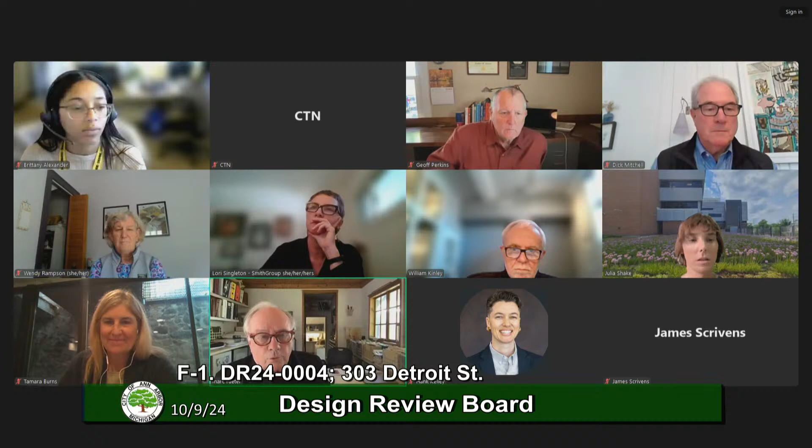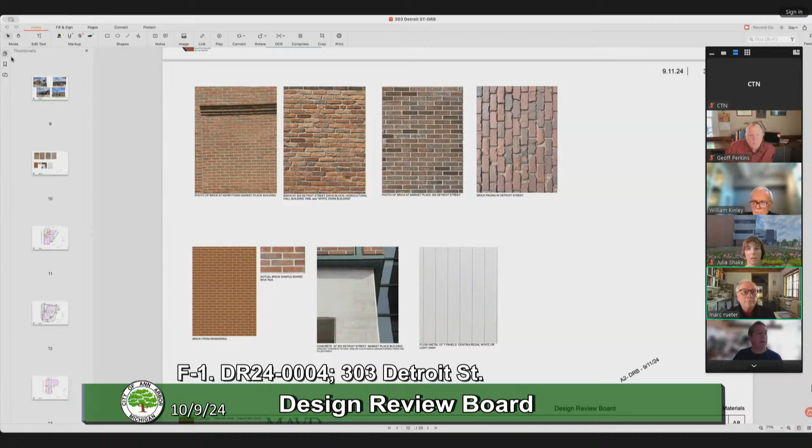So I'm not quite sure how we're going to handle the referencing here. Will you be allowing us to share our screens to show the graphics, or are you going to be doing that, Julia? No, you should be able to. Do you not see the share screen button on the bottom of your screen? Yeah, I'm going to have Jim share that. And is he promoted to speak also? Yeah. Okay, all right, great, okay.

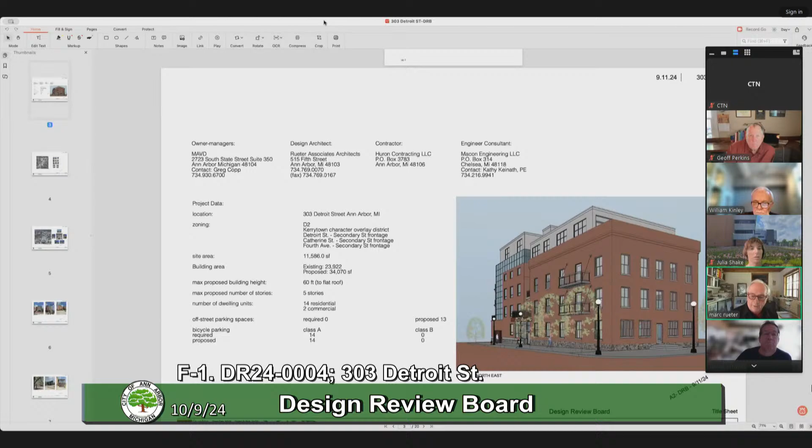So I'm just going to give a little recap here of our design concepts and what our ideas were, and then I'm going to have Jim, as the project architect, discuss some of the other features in more detail. If we go to sheet A4, Jim, which is the exterior views of the old agricultural implement hall and the 1988 addition.

We've looked at this building for a long time, since the building across the street, the Flatiron building directly across the street, took a lot of its design cues from the heavy concrete base that held up the other 4 floors, and some of the other sheet metal elements were incorporated next door.

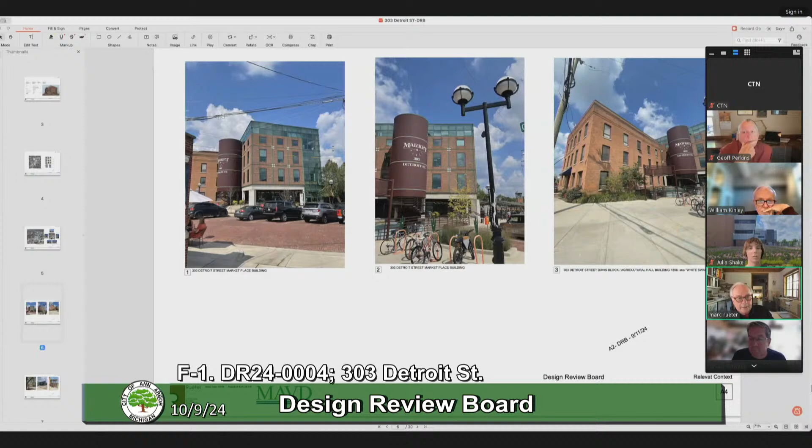Now, the agricultural hall building was built in 1856, and it was substantially renovated over the years with many improvements, including widening the windows to accommodate all aluminum sash.

We think sometime in the mid-50s, something like that. That's why the windows are not quite proportional. The width is not an 1856 kind of demonstration of how you would do a window like that.

Then in 1988, when the new addition was added, designed by Frederick Herman, the existing building was substantially upgraded structurally. The footings were underpinned, more steel was added to reduce the spans on the floors. So right now we have a quite robust 1850s building. The parapet has been rebuilt.

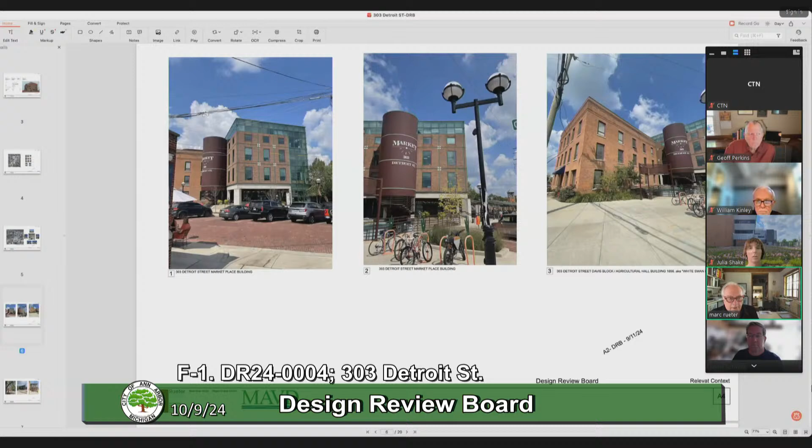Now, let's go to sheet A10. That's the first floor plan. I'm on A10, Mark. Or you're on A10. Oh, okay. Yeah.

One of the early questions was how are we going to handle parking, pedestrian access, elevators, and services. There was a lot of discussion among the design team as to whether we do it off of the Detroit Street side or off the 4th Avenue side. We came to the conclusion that it'd be better to preserve the garden court and the experience on the Detroit Street side and not encumber that with vehicle package drop-offs, pickup and loading, vehicular access.

So this led us to decide to create a new parking entrance with access to a carousel parking system that will accommodate 13 cars, as well as a drop-off and a new elevator located in the slot between the two buildings. And as you can see, the blue common area is a kind of continuation of that existing pass-through.

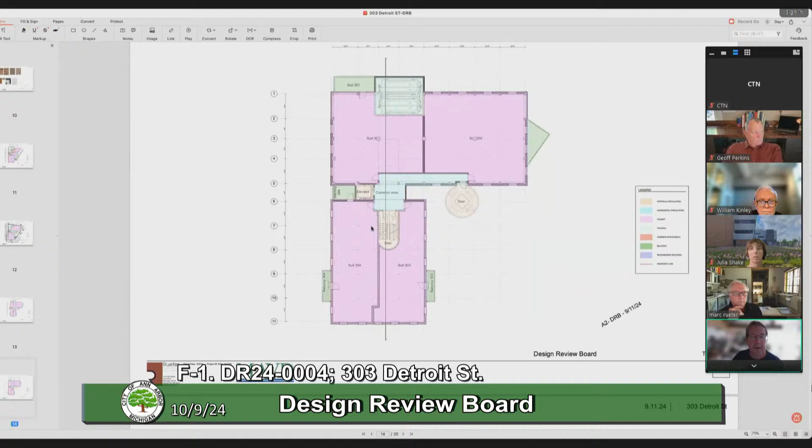Same thing on the 3rd floor, has nothing there. 4th floor, here we're going to add a story on top of the White Swan building. It's going to be accessed from the elevator. We are going to do this

suite. It's going to be a half a flight up from the original 4th floor because the parapet wall is so high on the White Swan building. We're going to have to offset this story. So it's going to have its own entrance from the elevator.

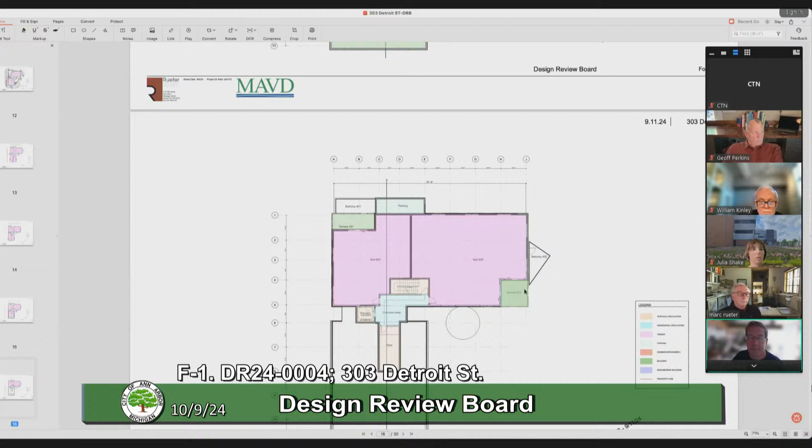On the 5th floor, we're going to add on to the 1988 addition with 2 suites up there, private balconies on opposite corners, and then a common space with the stairs there and the elevator access.

So in the elevation, we're maintaining everything that's original to the building. The only elements that are changing are the upper elements we decided to do with the 4th floor story here, the stair access and the elevator access, and then another 5th story up here on the 1988 addition. This large element here is our car carousel that's facing the farmers market parking lot.

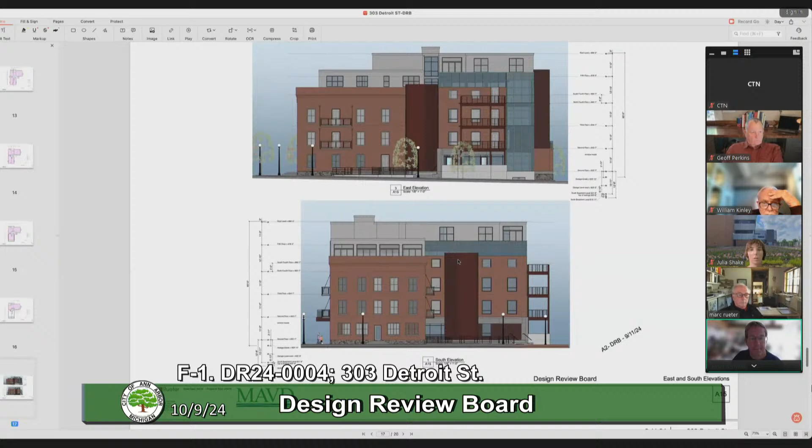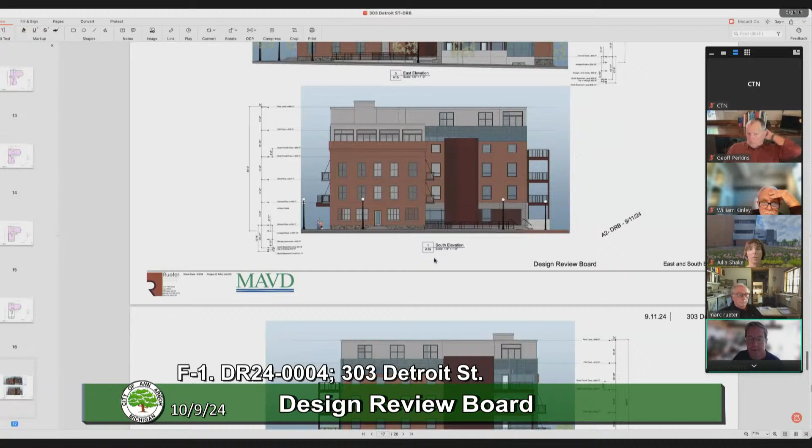Balconies will be added, and they're independent of the building except for the hung balconies that are on the White Swan building. We're going to maintain glazing up there for the upper penthouse suites and do a light metal, either gray or some kind of light metal.

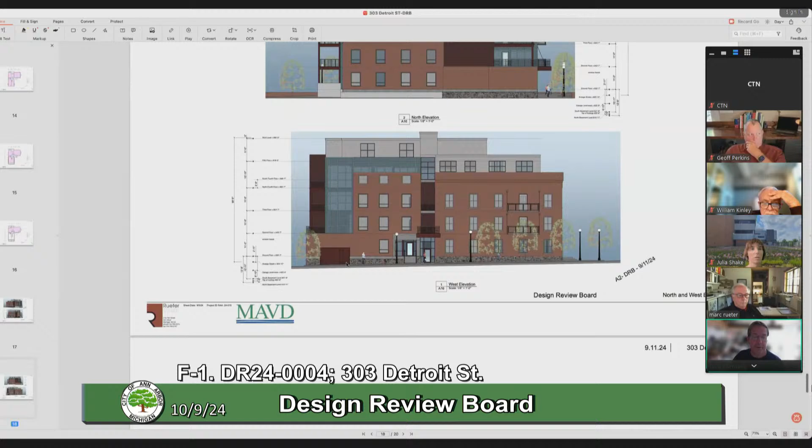This will be the access for the garage on 4th Avenue with a man door there that's accessible. This will be our new canopy here that we're adding as far as an element to our lobby that's at grade on 4th Avenue. And this is the perspective from Detroit Street looking towards that area.

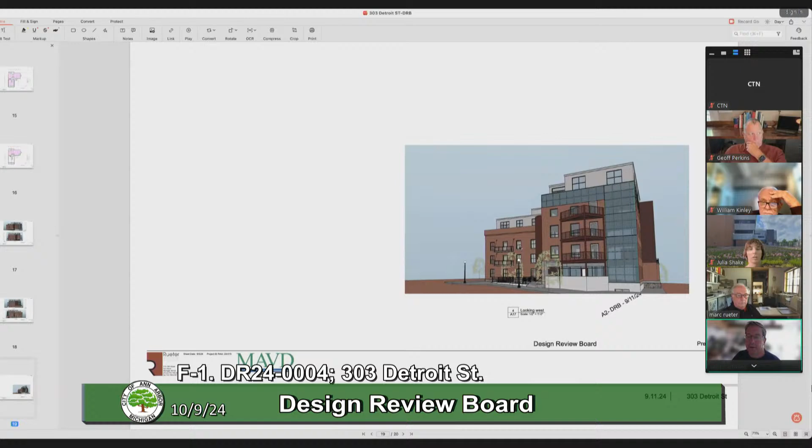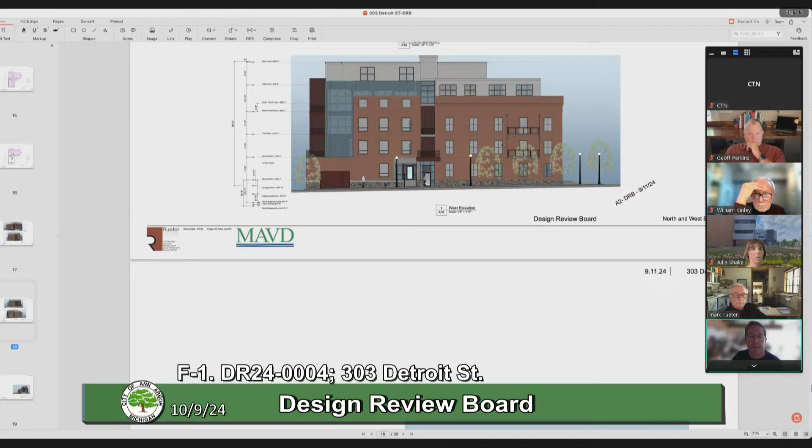The only thing we're going to be doing as far as a change to the building, we have to provide new windows for the facade. We're going to redo the glazing system because it's failing based on its 40-year life. The windows here that were originally in here are an older series awning with the fixed glazing. We're going to go back to more of a traditional window that will be in keeping with the White Swan building. So all these windows will be replaced with new modern window system.

And this is the section. Storage is down here. Car carousel will sit in here. And then the new suites up here on the upper story. Everything else is existing. We'll be just gutting the interiors of the office buildings, removing all the metal stud partitions and providing new spaces there for residents.

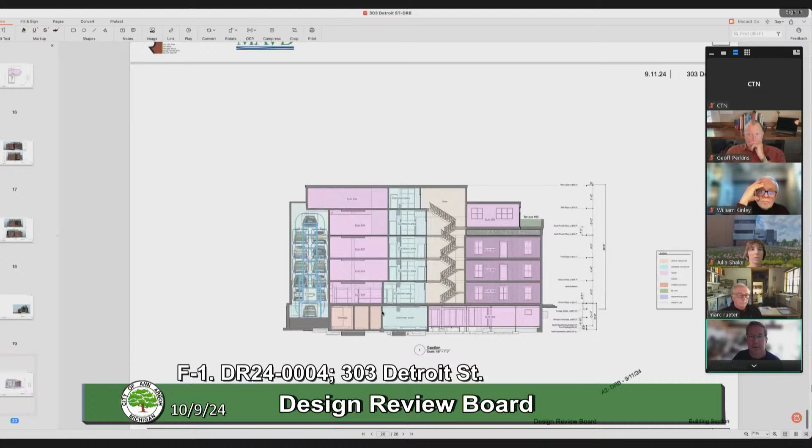That's basically everything that is happening to the building.

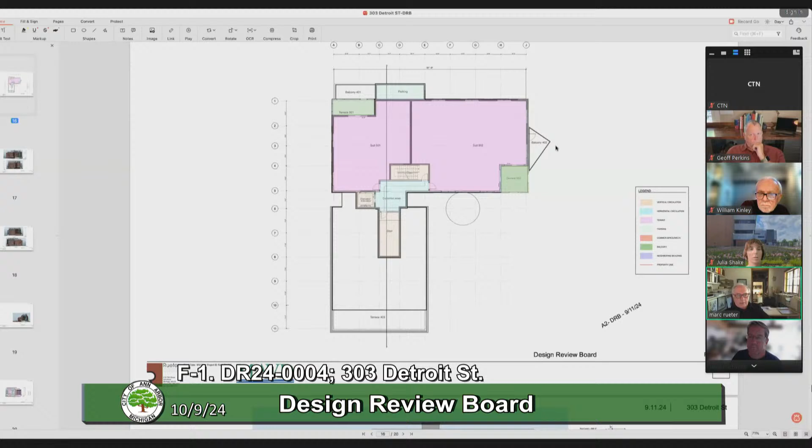Yeah, I might just add that the triangular balcony arrangement on the new addition is a kind of a reflection of the angle of Detroit Street. So whereas the old building assembly did not reflect the diagonals of Detroit Street, this balcony is a small reflection of those directional aspects of Detroit Street.

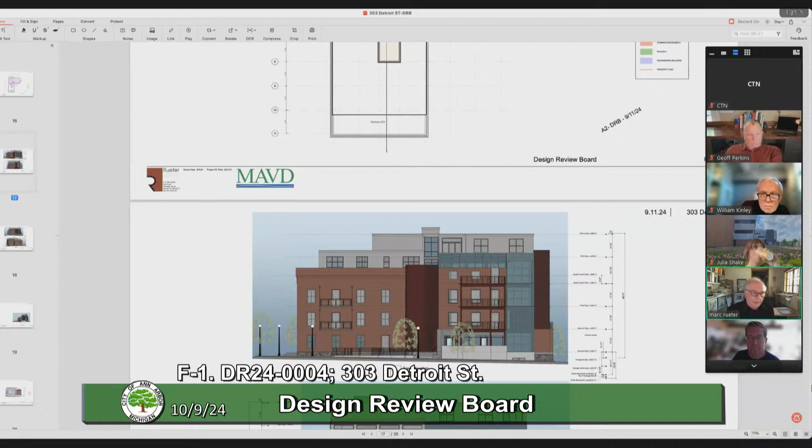Also, there is a signpost not shown in this rendering that's on the existing building that identifies the building, and it is a similar arrangement. It's right above the courtyard. You can see it on another sheet. I think we went by that earlier.

That's... which one?

So that's, I don't know how we're doing, but that's pretty much a wrap up of our project. And I guess we are open to questions if that's appropriate now, or I'm not sure what the procedures are.

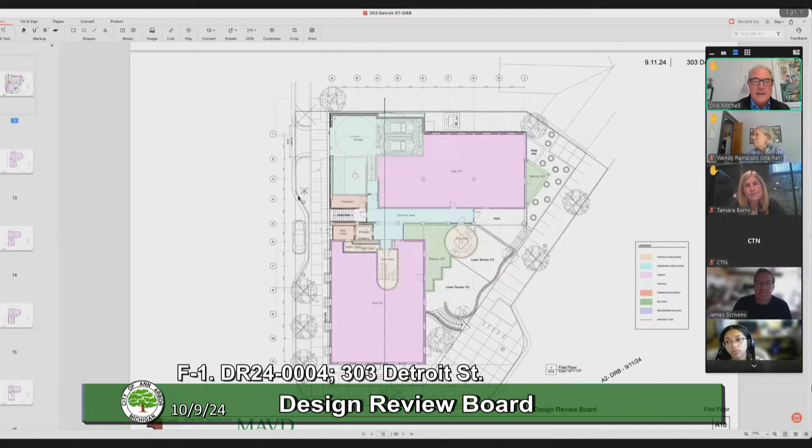Thank you, Dick. Wendy, you have your hand up. Question about, so the driveway is being relocated, understood, but there's a curb cut right now where I think the lobby is going to be where you have trash collection.

So where are you storing the trash for pickup? Our trash mitigation plan is the same as what we did next door. We are going to have housekeeping come in and collect the trash from the corridors and take it off-site to South State Street Commons, where it will be disposed of in the dumpsters. And the recycling as well? Yeah, recycling as well.

Other question is from this plan, it looks like the farmer's market shed comes right up to the property. So will that continue to be an option for pedestrians to cut that corner in the northeast? Once these become condos, will there be a certain sensitivity to people traveling over that property like is happening now?

Yeah, and we did keep a little bit of concrete space there at the end of the shed. We're re-landscaping it. We wanted to create a buffer both between the residents of the building and the farmers market, but yet be sympathetic to trying to provide some circulation space back out onto Detroit Street from the end of the shed. But there's not an easement there now?

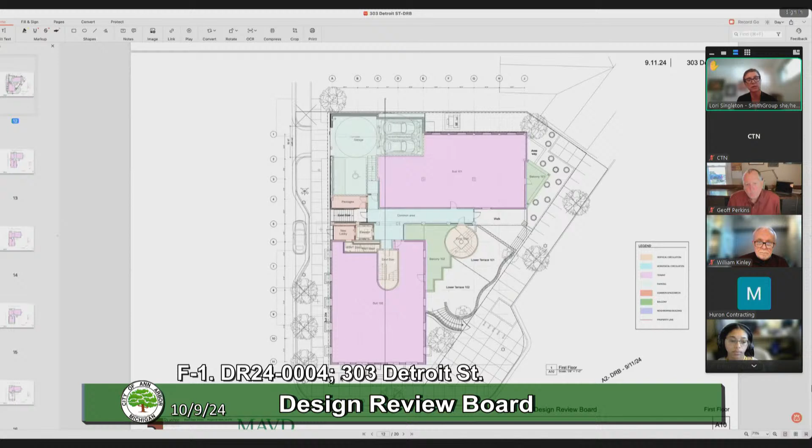I did just want to note, especially with the switch to residential use, the ability to look at the landscape surrounding the building a little more closely would be lovely to enhance. I know this is further down the line, but enhancing the beds that already exist—I would love to see an expansion of landscape and removal of some pavement on the south end adjacent to Unit 102. Those stairs, if only accessed from the south, could be landscaped all around to create more of an identity as a softer, more residential neighborhood feel there, reducing hardscape and incorporating permeability and lush landscape around that corner. So as much as we can remove of that hardscape and soften it, especially within the property lines, that would be wonderful.

Yeah, we can look into that. We've discussed that internally, about removing some of the sidewalk that's on that space there, without interfering with too much circulation. Might require some handrail reconfigurations or something, but other than that, would be great.

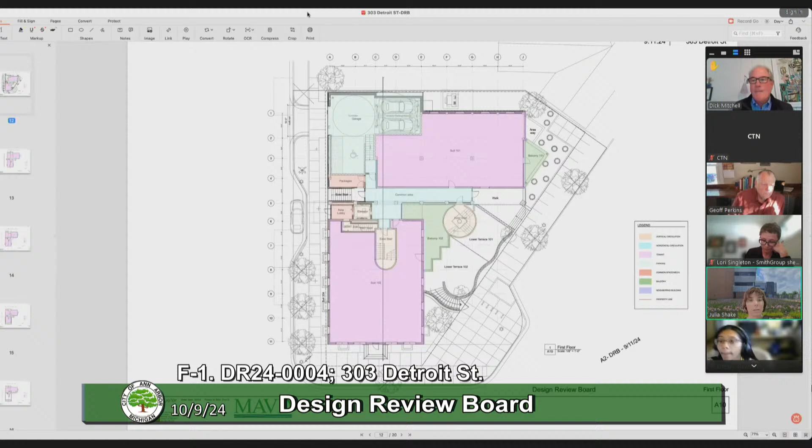Any other comments? Okay, Julia, thank you for that.

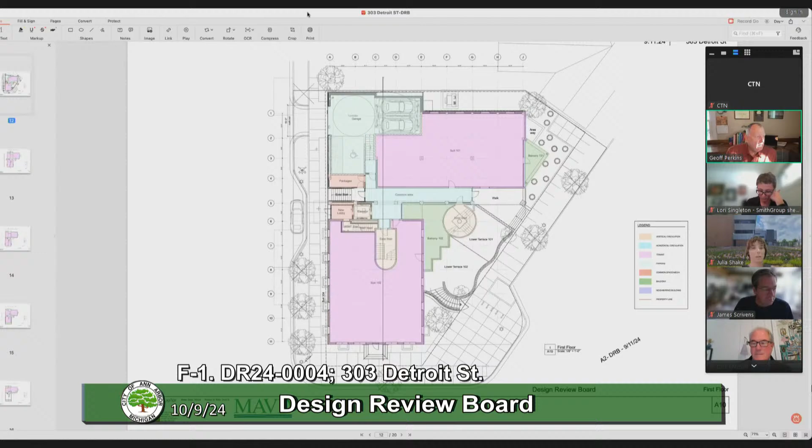Item G, moving on to unfinished business. There's nothing under that item—is there anything we need to talk about? Communications: various communications to the design review board. Do we have any communications? I thought I looked at this, and I think your audio is not working, Ms. Alexander, but we do not have communications.

Now is our second section for public comment. At this time, no participants or attendees have their hands raised.

Okay, I guess before we adjourn, anybody got anything to talk about? Yeah, hey Hank, I was wondering if you could update us on our fate. I know we went to Planning Commission, but I didn't see that meeting.

Sure, this will be several months away yet. I can share, if you'll bear with me, the exact date if you're curious. The topic was recently circulated with the Planning Commission at their working session—that would have been the September 10th working session. So if you're curious about the status of discussions, that's the latest one I know of. Those meeting minutes and the recording should be available through the city website and CTN resources. But as it stands, no formal language text amendments have been forwarded or agenda'd. Once those are, we will certainly let you know and keep you apprised of any dates, but I don't have a specific date when a text amendment would go before the Planning Commission yet, and then they would make a recommendation to City Council.